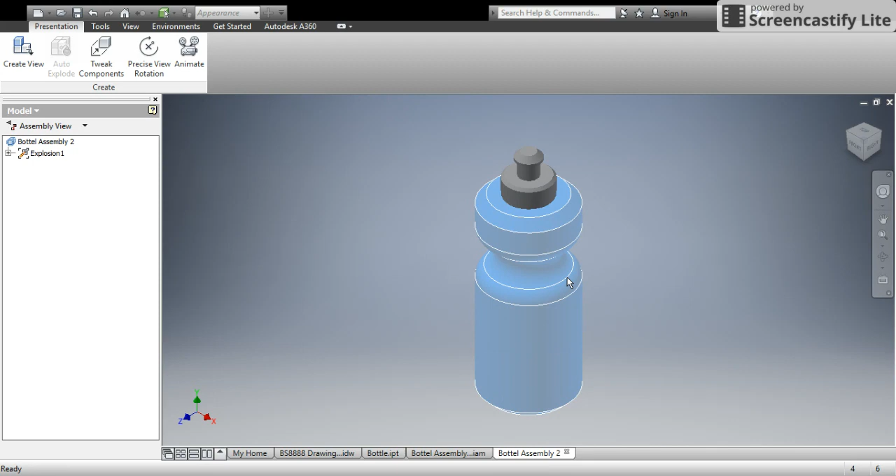Right, so I don't want to click auto explode. It might seem like an easy option, but it can glitch out quite often and do things that you're not expecting. Sometimes it does it right, but the skill that you're wanting to develop is being able to create these exploded views by yourself. So don't click auto explode. I'm just going to click OK, and then our bottle is going to come in assembled. I now need to pull these things apart. I'm going to do that using tweak components.

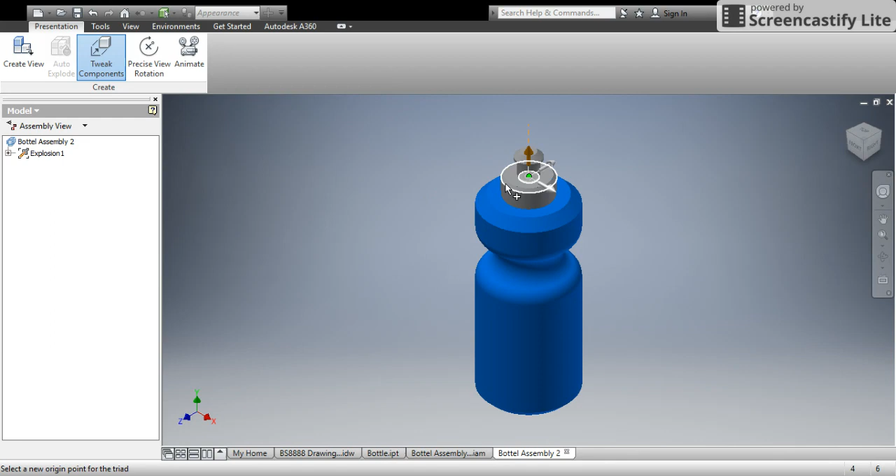Now, something that's worth pointing out is this is an incredibly frustrating interface to use in Inventor. You have to be patient with it, and it is a bit of trial and error. If anything does go wrong, that's what the undo button is for. Okay, so I get this little axis appearing. I'm going to click one of the surfaces of one of the pieces that I want to move. Now, my little arrows represent the directions that I can pull this in. Whichever one is highlighted is the direction that this is going to move.

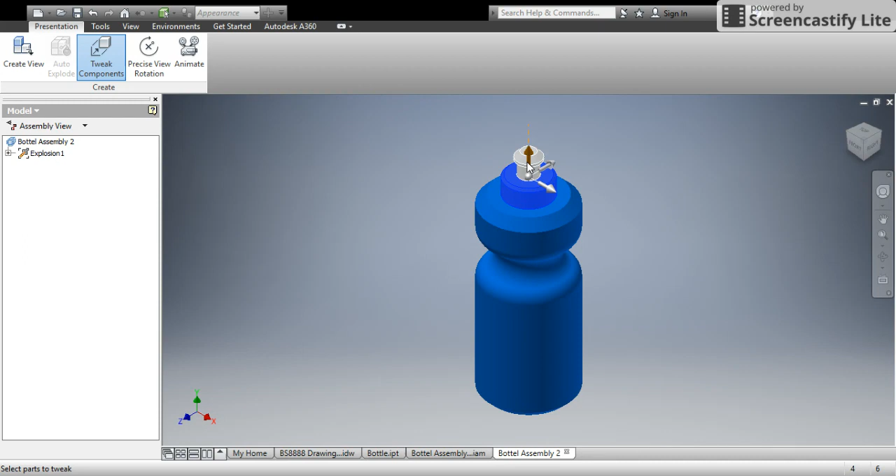So if I clicked and highlighted this arrow, I would move my lid in along this direction, which happens to be the x-axis. But I want to move it up and down, so the one that's automatically been selected, the y-axis, is the correct one. So I'm just going to click and I'm going to drag it. Now you'll see here that it has moved and it has not taken the cap with it. That's actually fine, but if for any reason I didn't like that, I could just click the close and the undo. But I'm actually okay with that, so I'm going to click the tick.

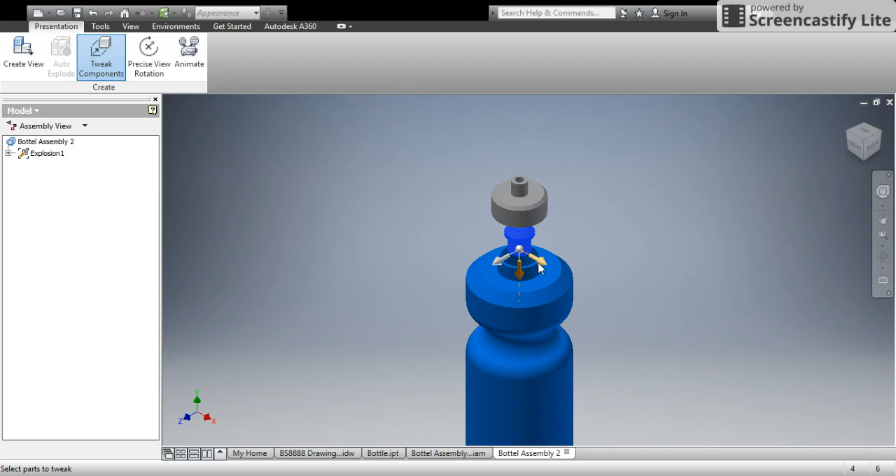I'm just going to pan this up a little bit. Come on, computer. There we go. Tweak components, pick one of the surfaces, check that I've highlighted the correct direction. If I wanted to, I could click another one. And I'm just going to drag it up to where I want it to go.

Now, something that is important with an exploded view is you want to, wherever possible, avoid the things overlapping. So I would not want to leave my lid there. I would want to make sure that it's moved so that it's not overlapping by the time that I press that little tick. When I'm happy with it, I am simply going to save it. And let's save this as bottle exploded.

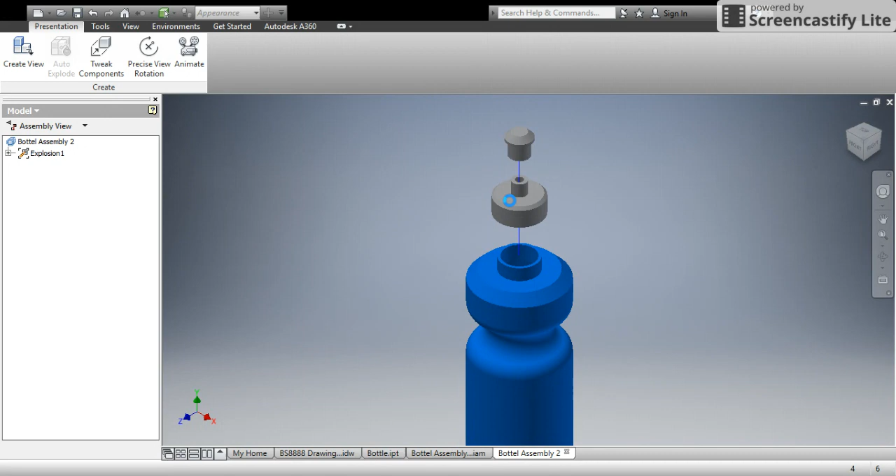Save that. Now this might pop up, it's fine. All it's referring to is if there's been any edits happening on any other models, do you want to save those things? Normally clicking yes to all is fine, and then clicking OK. Okay, so let's go back to our drawing. I want to get my exploded view over here. So I'm going to go back to Place Views and Base, and it has automatically brought it in. If it hadn't brought it in, I could go looking for it in there.

Now, if your assignment asks you for a 2D exploded view, that would be fine. That would be exactly what it's looking for. However, I want an isometric exploded view. So I'm going to use the view cube to orientate it until it's where I want it to go. Now, I want a little bit more detail visible on this, so I'm actually going to up the scale to 1:1. Okay, now you can see that I've got these little leader lines that show how these components go together.

And I'm just going to use the annotate command like we've used before, and the text, exploded isometric. If it's an exploded isometric, say it's an exploded isometric. You could say exploded pictorial, but if you're being asked for an exploded isometric, make sure that you put in exploded isometric.

Now, if I was putting this drawing on the page without any of this information, and it was the only thing that was there, I would want to put a parts list on and balloon this information in here. I don't need to because I've got my balloons over there. If you want to see how to do that, look back at a previous video about assembly drawings.